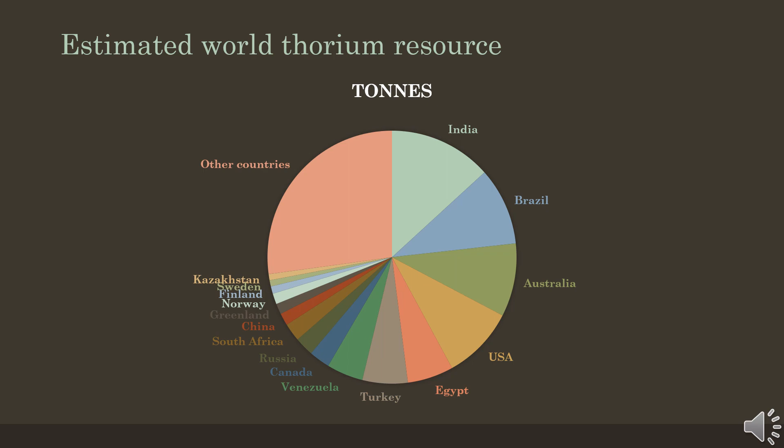So, as it was said earlier, thorium is more fertile rather than fissile. So, as it is not fissile, it is not directly usable in a thermal neutron reactor. However, it is fertile and upon absorbing a neutron, it will transmute to uranium-233, which is an excellent fissile fuel material.

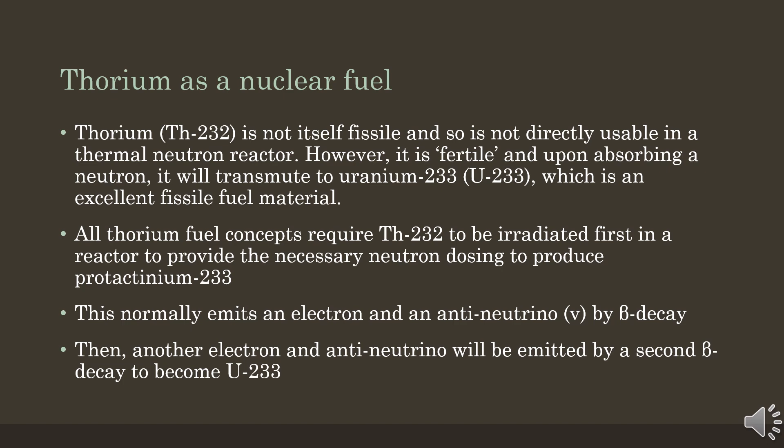All thorium fuel concepts require thorium-232 to be irradiated first in a reactor to provide the necessary neutron dosing to produce protactinium-233. This normally emits an electron and antineutrino by beta decay. Then another electron and antineutrino will be emitted by a second beta decay to become uranium-233.

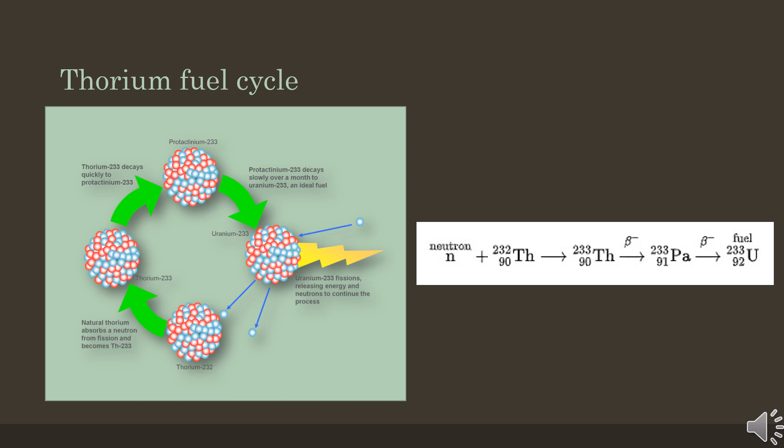Now we will see what is the future of thorium reactor. With huge resources of thorium, India has planned to utilize thorium for large-scale energy production as a major goal in its nuclear power program. The first proposal of utilizing a three-stage concept was introduced at the University of Chicago in 1944. First, pressurized heavy water reactors and light water reactors fueled by natural uranium producing plutonium that is separated for use in fuels in its fast reactors and indigenous advanced heavy water reactors.

Second, fast breeder reactors will use plutonium-based fuel to extend their plutonium inventory. The blanket around the core will have uranium as well as thorium, so that further plutonium, particularly plutonium-239, is produced as well as uranium-233. Thirdly, advanced heavy water reactors will burn thorium-plutonium fuels in such a manner that breeds uranium-233, which can eventually be used as a self-sustaining fissile driver for a fleet of breeding AHWR. In all of these stages, used fuel needs to be reprocessed to recover fissile materials for recycling.

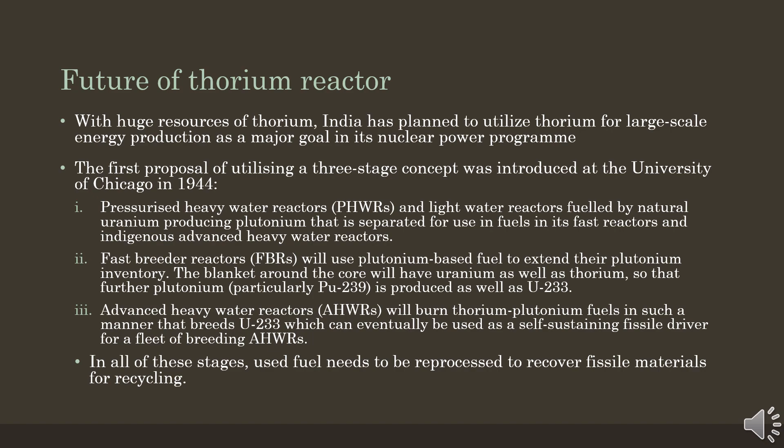Right now, India is focusing and prioritizing the construction and commissioning of sodium-cooled fast reactors in which it will breed the required plutonium, which is the key to unlock the energy potential of thorium in its advanced heavy water reactors. This will take another 15 to 20 years, and so it will still be some time before India is using thorium energy to any extent.

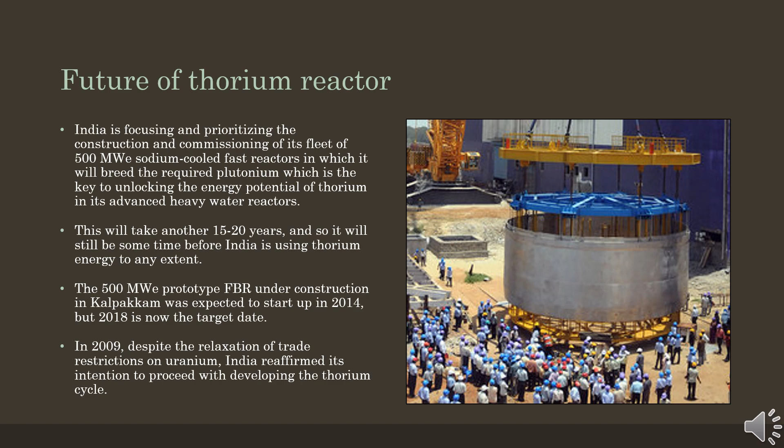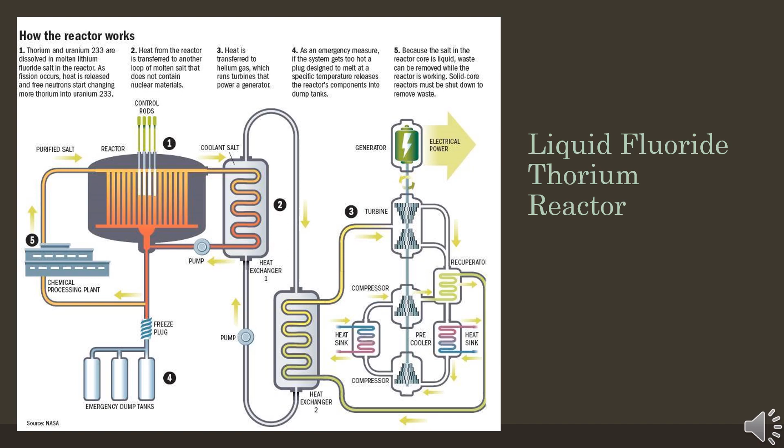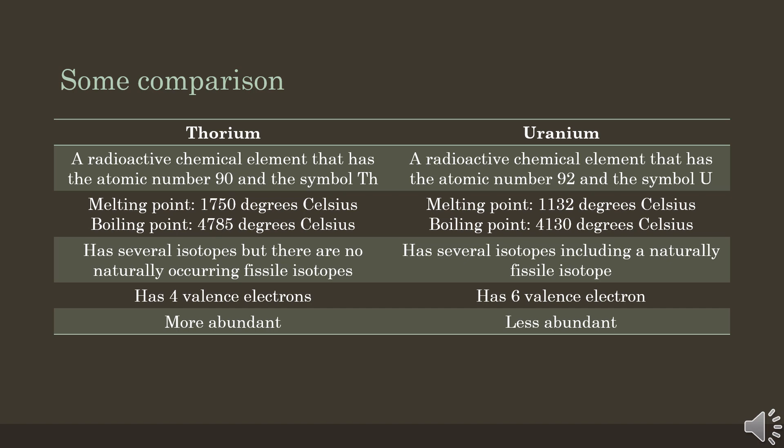while for uranium it has 4130 degrees Celsius, and thorium also has a higher boiling point. So another significant comparison is that thorium is more abundant than uranium.

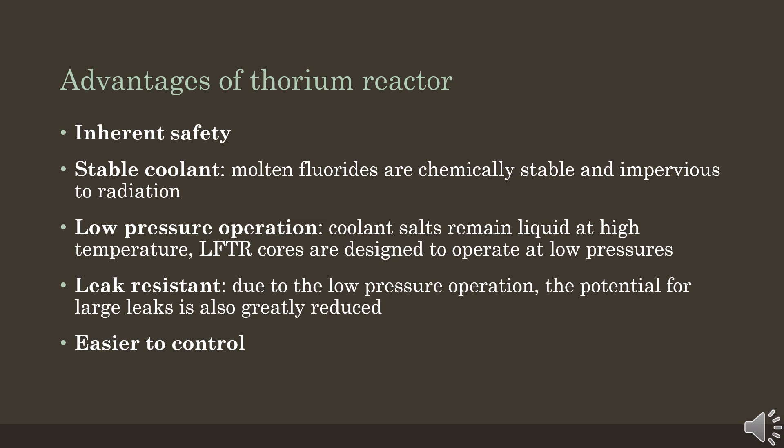Now let's look at the advantages of thorium reactor. So thorium reactor has stable coolants, where molten fluorides are chemically stable and impervious to radiation. It also has low pressure operation, where coolant salts remain liquid at high temperature. The LFTR cores are designed to operate at low pressures, and thorium reactors are leak resistant due to the low pressure operation. The potential for large leaks is also greatly reduced, and thorium reactor is easier to control.

The disadvantages of thorium fuel include: thorium-232 needs to be converted to uranium-233 using neutrons from another source. Now neutrons are expensive to produce and the conversion rate is very low, so the time taken to build up a usable amount of uranium-233 is very long. Reprocessing thorium fuel is less straightforward than with the uranium-plutonium cycle. And lastly, uranium-233 is weapon-usable material with a low fissile mass and low spontaneous neutron source.